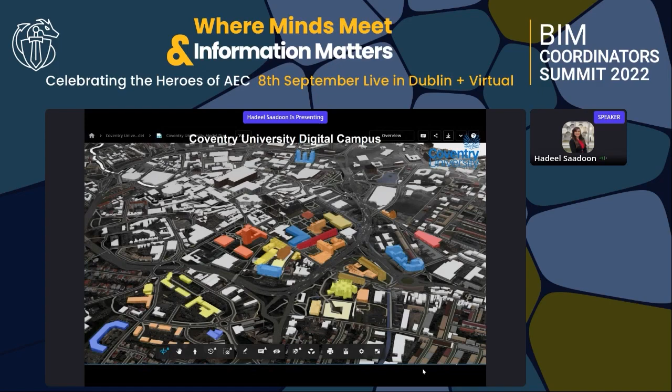Today, this session, I'm going to speak to you about Coventry University Digital Estates journey and the digital transformation that has gone through. Over the past 5 years or so, I've worked at Coventry University as a BIM manager. We started by digitizing the university campus information with a vision to get all of the information in one central location available for all stakeholders to support the operational and maintenance of the university campus. And it has been a really enjoyable journey.

It started by looking at the BIM policies and standards, and also looking at the available data and the legacy information and how to review those, and surveying the university buildings, and then retrospective modeling of the existing estates. Then we've moved forward to look at software solutions and systems to host information like the common data environment that was procured back in 2020.

And the main enabler for the progress and support and the development of this journey was collaboration, mainly collaboration between the various stakeholders and the internal teams of the estates, including the development teams and the project managers, the operation maintenance teams, the technicians, and also the soft services and key technical services at the estates.

Moving forward, the next steps of the development of this digital journey is looking at systems integration and also to develop a digital twin of the university, which could provide immense benefits for the operational management of the estates and also for the full life cycle management of the building information.

The main goal was to add value estate-wide for better information management for all the various teams that do require access to building information, including the facilities teams, environment, health and safety, operational maintenance, even catering, access control. All those teams require access to accurate and up-to-date information of the university buildings.

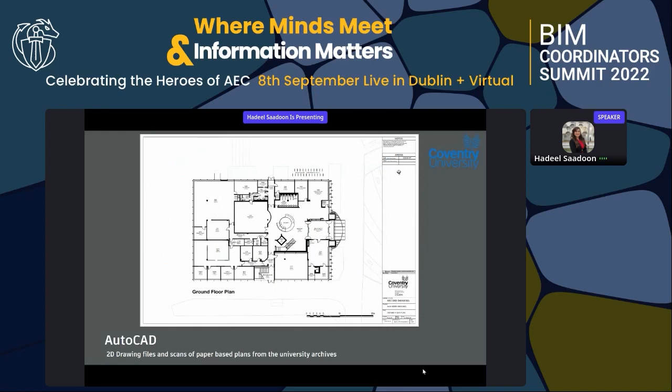The baseline for those data was AutoCAD plans and 2D plans in general that come from various software solutions, and also even paper-based format that we had to look at and investigate and ensure site surveys are done before we can progress with updating the data. And this was the basis that helped to create the BIM models.

The key tools and processes we've used were various and numerous, including planning, surveying skills, the use of collaborative cloud-based solutions, project management skills, BIM modeling skills, the use of digital maps, parametric design, automation, looking at data hosting, facilities management, and eventually digital space management.

These skills were not easy to develop within the team, because we started with basic drafting skills within our team, which consisted of CAD technicians that have now progressed to BIM coordinators, system administrators, and business support officers, and also assets and record administrators. Developing the skills of the team, and then providing training to the wider key teams in this space, was one of the main keystones to ensuring that the digital transformation is successful. It was not an easy journey, because...

It required a lot of training and attention to ensure people are supported, people are encouraged to develop gradually, and the results were really good, because people were more confident, more comfortable in using digital tools, and were more able to embrace change in a more streamlined way.

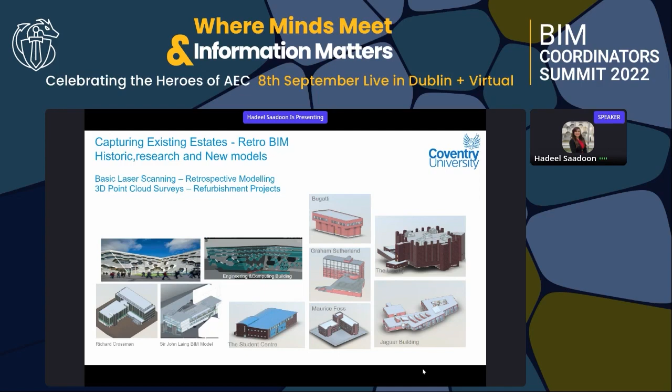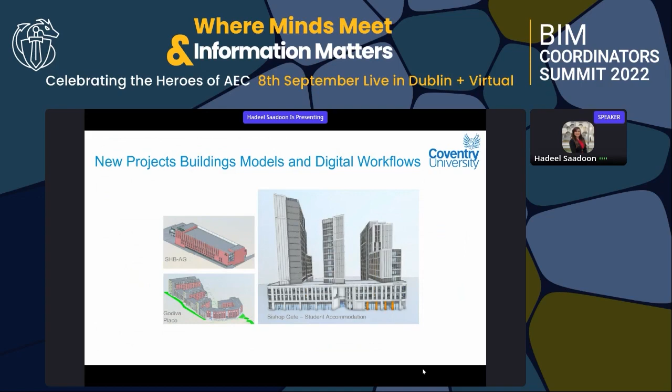For the new buildings and refurbishment projects, we used a lot of scanning and surveying techniques, ranging from basic laser scanning to 3D point cloud surveys, that supported the retrospective BIM modeling of those buildings. This led to us having a full library of BIM models that came from new projects, historic buildings, and from refurbishment projects.

It was also essential to ensure that data governance and procedures were included in the contracts of projects, so that when new or refurbishment projects are completed, we receive the right information requirements. The asset information requirements help us develop the exchange or employers information requirements, and these were key to ensure the estates teams receive accurate information compatible with the existing systems they've got, the operational facilities management systems, and that it meets the maintainable assets list used for the operations of the estates.

Compliance was, of course, really important with international standards, and other policies and procedures had to be developed internally in terms of naming and numbering conventions for space identification, and also for document naming and numbering, for CAD or BIM drafting and layering policies, and systems import to ensure drawings are compatible with the existing internal systems, most importantly, Planon.

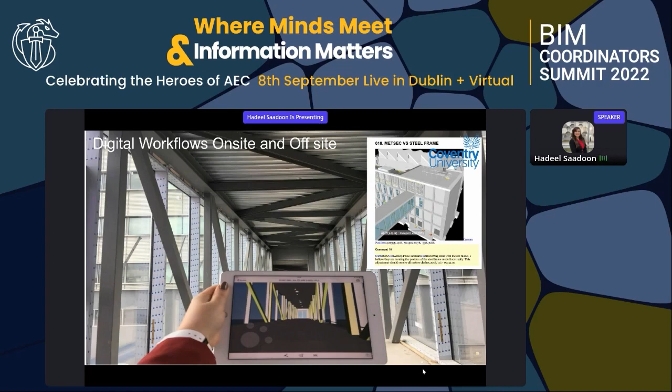Digital workflows were developed as well for using the models on-site during construction and off-site for operations. In this example, we've got the Beatrice Shilling building during the construction phase. This all helped to develop the Coventry University Digital Campus.

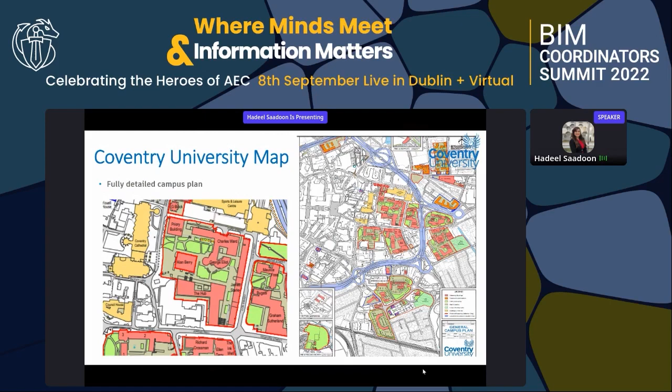The main basis used is fully detailed campus plans, surveys of the site of the university. As you see here, it sits at the heart of Coventry city. It's not a separated campus outside the city, it is fully integrated with the city of Coventry, and there are excellent opportunities to link with the city council and future planning for the city.

This was the basis of creating the full model of the university campus, starting with Autodesk InfraWorks. The future plans are to look at GIS solutions, including ArcGIS, ensuring the maps are up to date and hopefully moving into live environments with ArcGIS, so that the information in this model is always up to date, always live, and always taking the latest information of GIS maps.

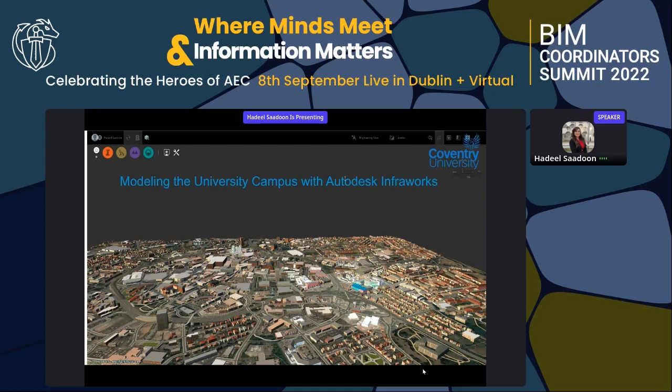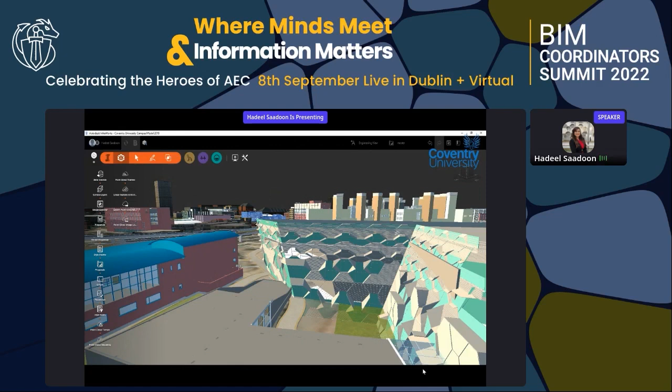We can see multiple models in here. This is an example of a refurbishment project on Mile Lane. This is an example of an existing building model, the engineering and computing building. This is an example of a complete new build, the Beatrice Shilling building.

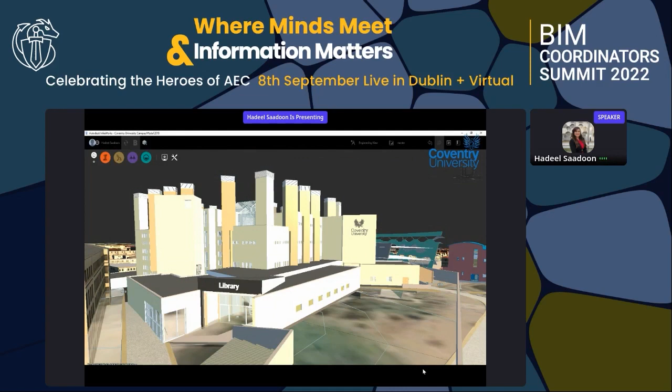Here are examples of existing buildings at the university, the Student Hub, the Richard Crossman building, and another example of a full new build of the Science and Health building, the Alison Gingell building. This one is an example of an existing building model that also had a refurbishment, the library.

And here, another building that the university is looking at to change the landscape of the university and do some master planning, to see how this land can be utilized, how additional landscaping options are added, and also how to encourage the people of Coventry to use the public spaces within the university. So these kinds of models aren't just used for operational needs, but are also really useful for master planning and planning for the future vision of the developments.

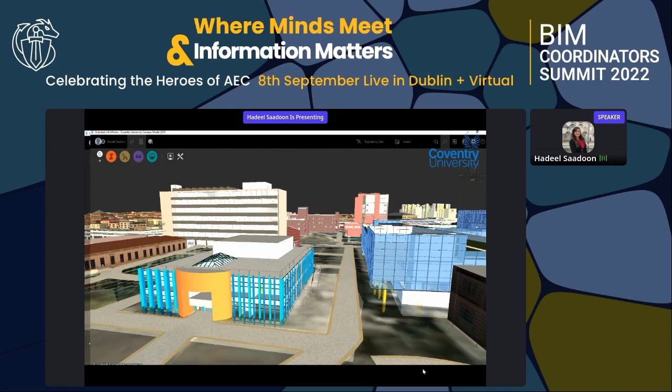The project deals with complex data sets, managing multiple campus systems, buildings, and data sets, and it is a complex estate. There were campuses in Coventry, London, and Scarborough, and also multiple international hubs, with a lot of information that had to be looked at as part of this major development. This includes access data sets hosted on various locations and affecting various teams.

There were space management challenges because any change in any space affects multiple things, such as space numbering and drawings, and also physical changes in door numbers, wayfinding signage, and distribution board labels. All those kinds of things are affected by spaces, and without doing full research to understand the change effects, we wouldn't be able to capture and ensure they are changed when a change is triggered.

The systems were also very complex. A lot of systems are used for the operational needs of such a large estate, and ensuring those systems have accurate data sets is essential to support all those various teams and ensure their services are delivered in the right way.

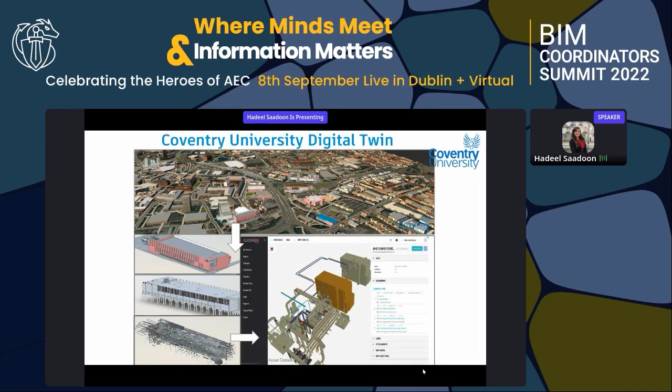The wider vision is to continue developing this work into a digital twin, with information on the buildings - not just architectural information, but structural, mechanical, electrical information, and also asset information, ensuring that asset information details are captured and linked to the operational maintenance manuals and documentation. This is still at early stages.

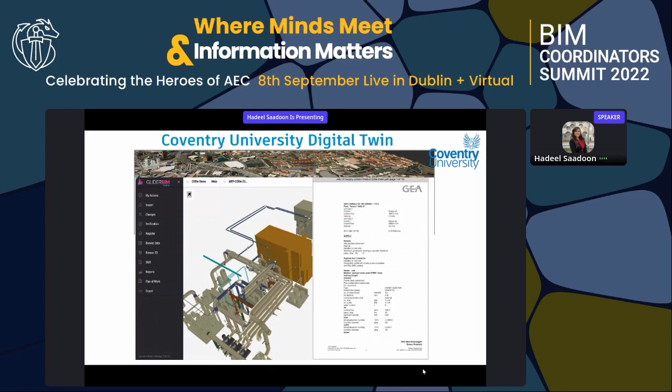The vision and ambition is to ensure that all the information of the university buildings is captured, tagged, and available on the system. It's an ongoing project that will eventually ensure all documentation of all buildings is available in one location, and links to the university BIM models as well.

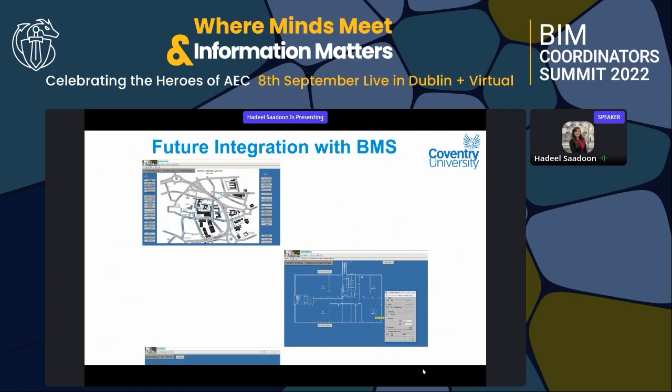For the future, the vision is to integrate with existing systems such as Planon, the facilities management system, and also to integrate with the building management system and other systems at the estate, such as timetabling and energy management, to ensure accurate space planning, facilitate access to the right information from various stakeholders, and support the development of the digital estate.

One of the benefits of digitizing the information was evident during the COVID-19 crisis, because without having done this whole work, we wouldn't have had access to fully up-to-date building plans and accurate information.

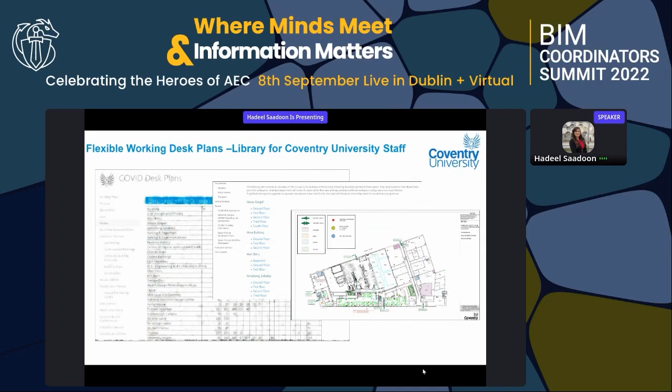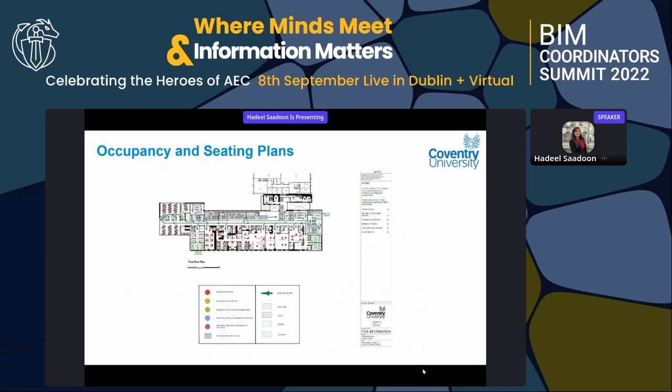This really helped to have this library to plan for flexible working and social distancing plans - the production of one-way and two-way systems, planning for occupancy, and seating plans for reduced seating for social distancing, as well as planning for signage layout for floors and walls.

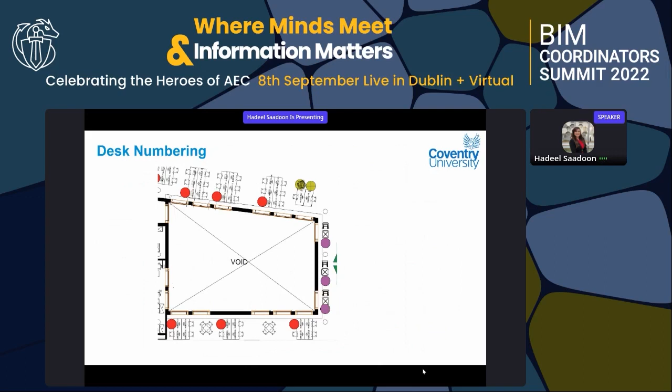It was a massive project that had to be done in a very, very short period of time, with a high level of detail that includes even desk numbering. Without having access to all that data readily available on our systems, it wouldn't have been possible to produce this kind of information.

This also supported the closure of the campus, and the plan for returning to work. The adoption of remote working solutions really helped with this process, enabling remote reporting on flexible workspace reservations, remote management of work orders, and remote management of project requests as we moved to hybrid or remote working models.

This is a summary of the Coventry University digital journey, and the ultimate goal of all of this is to continue providing open and safe places to welcome students on campus, to facilitate education, and to help them with their education needs and their journey to develop and upskill in this wonderful university environment.